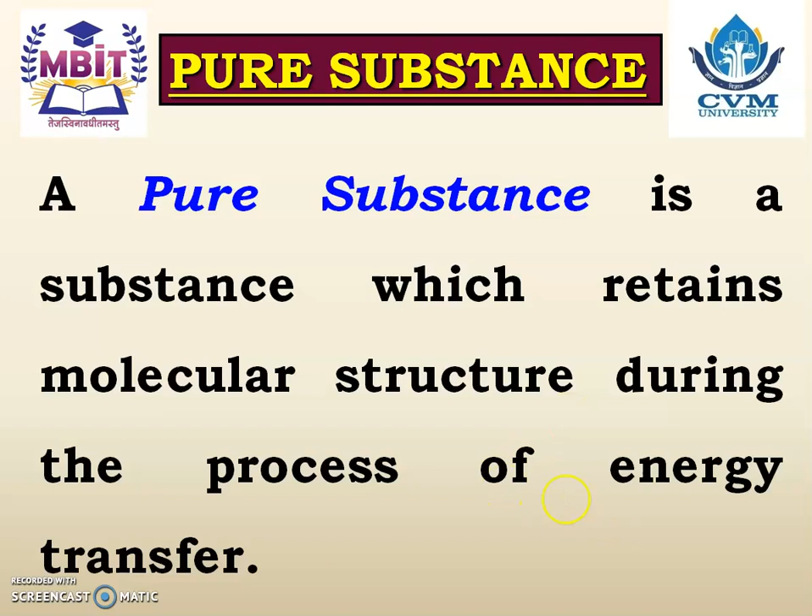Pure substance. A pure substance is a substance which retains the molecular structure during the process of energy transfer. So it means whenever the transfer of heat or energy takes place from one place to another place, if the substance does not change its molecular structure, then that substance is known as the pure substance.

Working substance. A fluid which has the ability to receive, to store and to reject energy as per the requirement is called working substance or working fluid or working medium. It means a fluid which can receive the energy, which can reject the energy as per the requirement. What is the requirement? The interactions between system and surrounding, and that fluid is known as the working substance, working

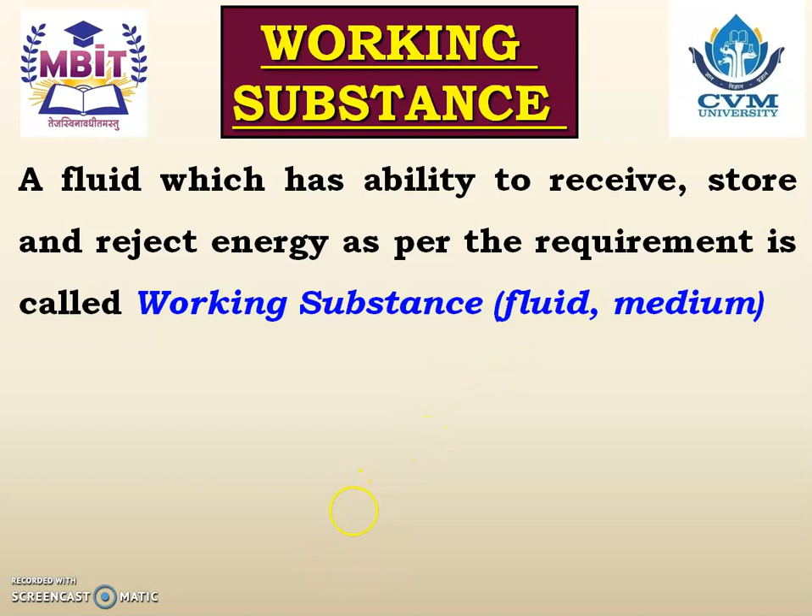fluid or working medium. The working substance may be of two types. One is liquid, another one is gaseous. The example of a liquid working substance is water used in steam power plant and ammonia used in the refrigerator. Now let us study the example of steam power plant.

So we know that in steam power plant, water is supplied to boiler, where boiler converts the water into steam. That steam is supplied to the steam turbine, in which power is generated. After the turbine, the steam is converted back again into water, and the same water is again supplied to the boiler. So this is the working substance, that is water in steam power plant.

And that water receives the heat in the boiler. The steam rejects the heat in a turbine or in the next component. So water is the working substance. In gaseous form, air is the working medium in air compressor. Another example is mixture of air and fuel for IC engine. It means mixture of air and petrol in petrol engine and mixture of air and diesel in diesel engine.

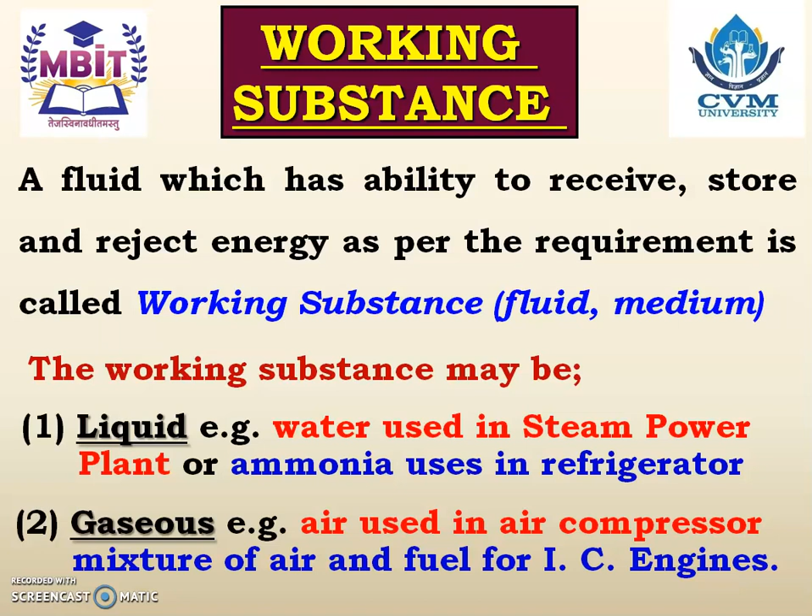Thermodynamic property. How to differentiate between two open systems or two closed systems or two isolated systems? Now you find out how we can differentiate between them. I think we require to compare their parameters. So we have to compare their parameters, and by that we can differentiate between two open systems or two closed systems or two isolated systems.

These parameters are known as thermodynamic properties. So when we have to compare or differentiate between two systems, we have to compare their thermodynamic properties, and then we come to know the differentiation between two systems. Some of the thermodynamic properties are pressure, volume, temperature and enthalpy. By using these properties, we can differentiate between two open systems as well as two closed systems.

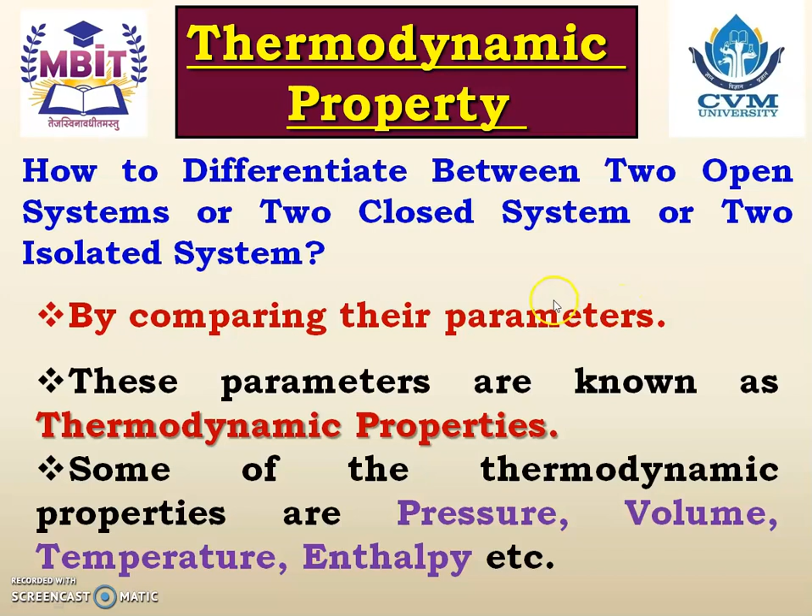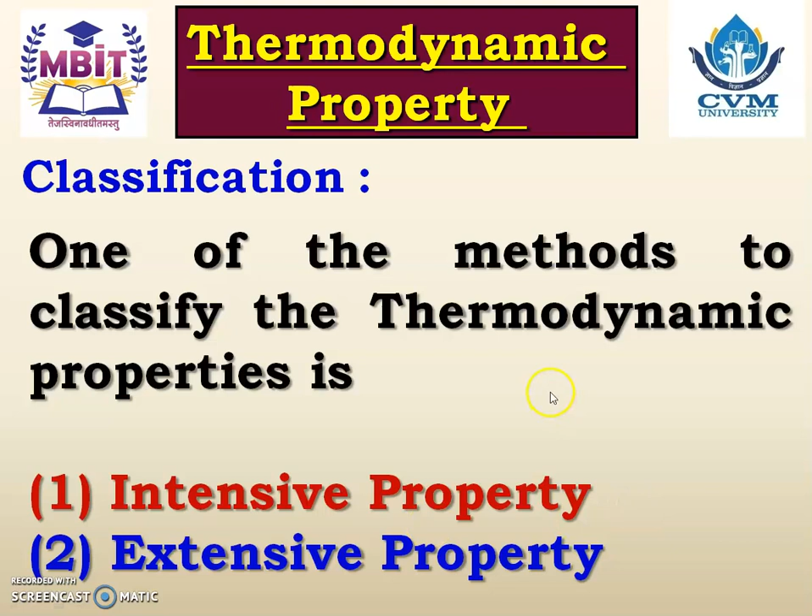Classification. One of the methods to classify the thermodynamic property is intensive property and extensive property. So the thermodynamic property can be of two types. One is intensive thermodynamic property, another one is the extensive thermodynamic property.

Intensive thermodynamic property. The thermodynamic property whose value does not depend on mass of the system is known as intensive property. It means the system can have 2 kg of mass, or 10 kg of mass, but its property is not affected by that mass. Those properties are known as intensive properties. And the examples of intensive property are pressure, temperature, etc.

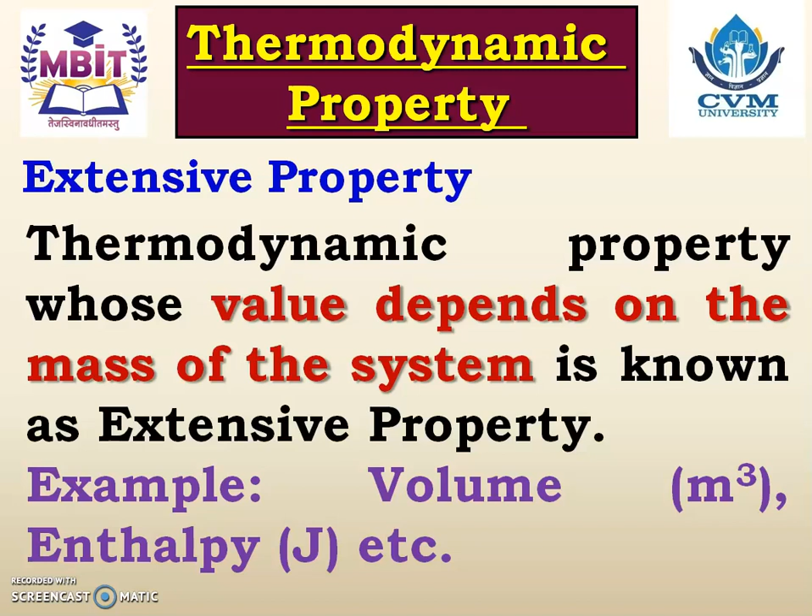The next is the extensive property. The thermodynamic property whose value depends on the mass of the system is known as the extensive property. It means the value of that property will depend upon the mass. If mass is 1 kilogram, the property will be different. If mass is 10 kilogram, the property will be different. So what is the example? Volume and enthalpy.

Generally, the value of extensive property is expressed in per unit mass value, which is known as the specific extensive property. It means generally whatever extensive properties are there, they are expressed in per unit mass value, right? Example is specific volume, that is meter cube per kg. Another example is specific enthalpy, that is joule per kg.

If it is a total volume, the unit will be only meter cube. But here it is specific volume. It means volume per unit mass of the system. So it is known as the specific extensive property, and its value is in per unit mass value.

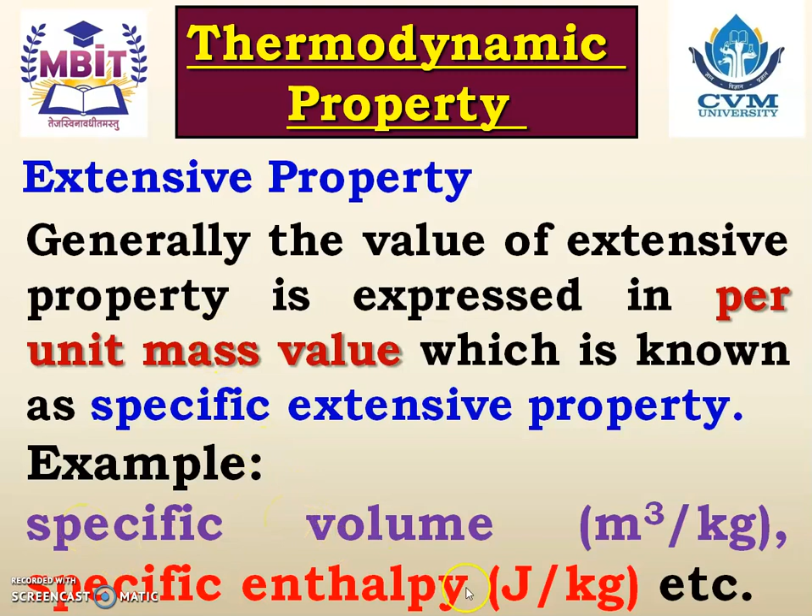The value of a property of a system defines its state. Now this is again another fundamental. So if a system has some property, it is said that the system has this state. Let us take the example.

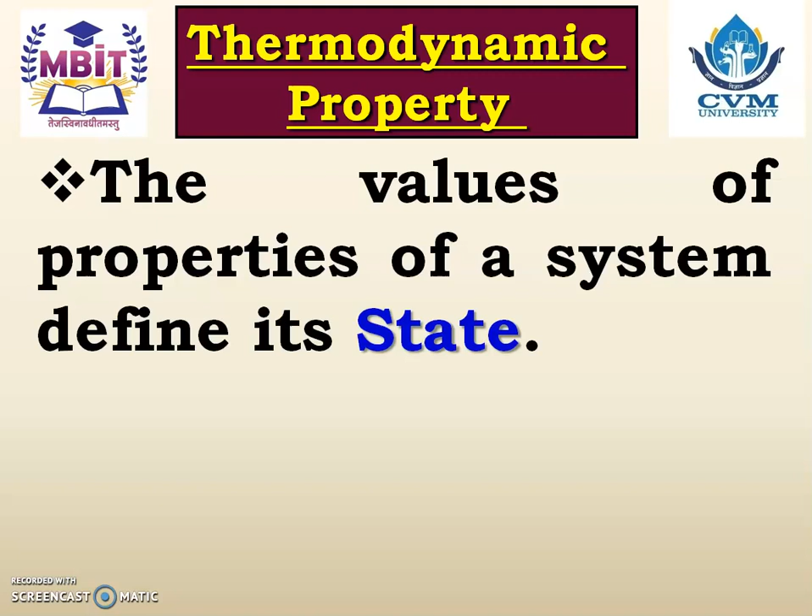Yes, there are two smileys. This is smiley number 1 and this is smiley number 2, and both have different states. One is the laughing state, another is the crying state. And what is the value of that, you can say, laughing state? Yes, that smiley is showing his white teeth. So we can say that yes, this smiley is in the laughing state.

And here, what is the property of this crying smiley? The property of the crying smiley is, you can say, not a good facial expression. Then it is the crying state of the smiley. So this is how the property of a system defines its state. So by looking at their face value, you can identify this person is in an angry mood, this person is in a good mood. So this is nothing but how you can differentiate different states of a particular system.

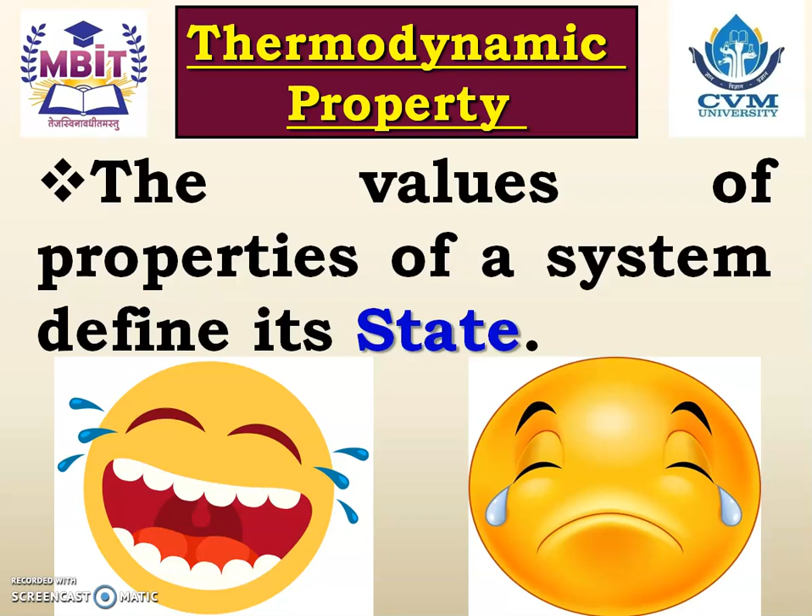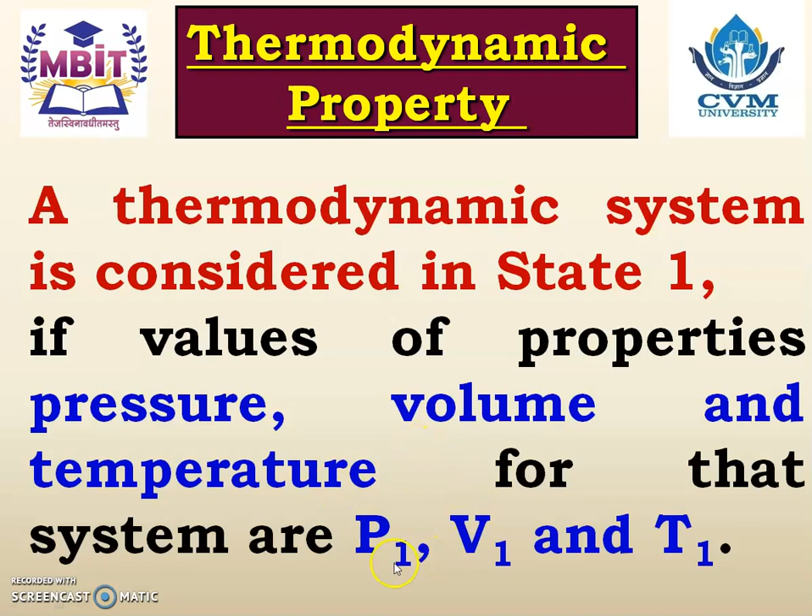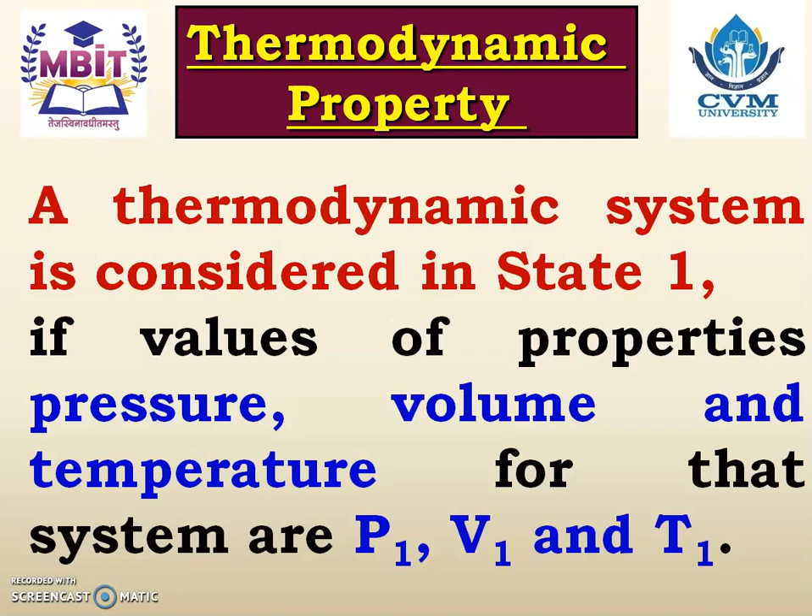A thermodynamic system is considered in state 1. If we compare with the smiley, we can say that it is in a good mood, or smiling mood. Its values of property, which property? Pressure, volume and temperature are P1, V1 and T1. So if pressure is P1, volume is V1 and temperature is T1, then that system is in state number 1. If any of the property changes, the state of that system will change. The value of the property changes, the state of the system also changes.

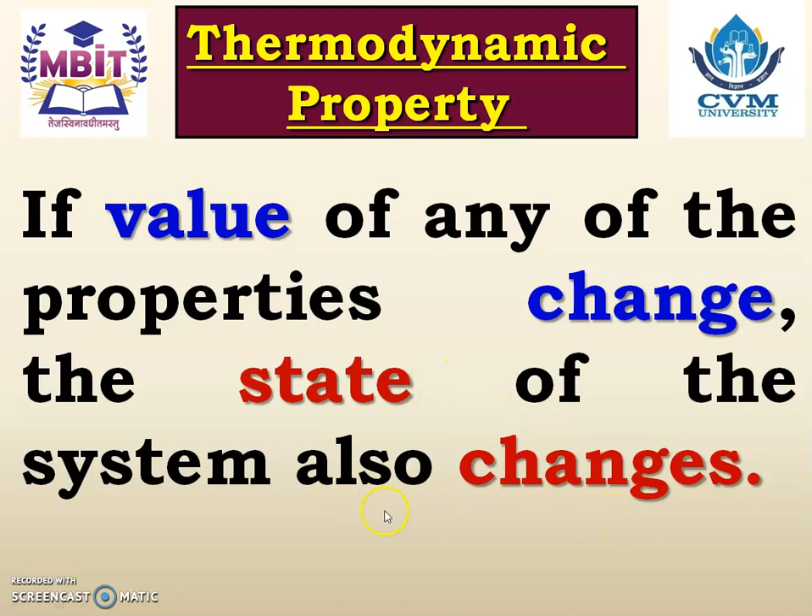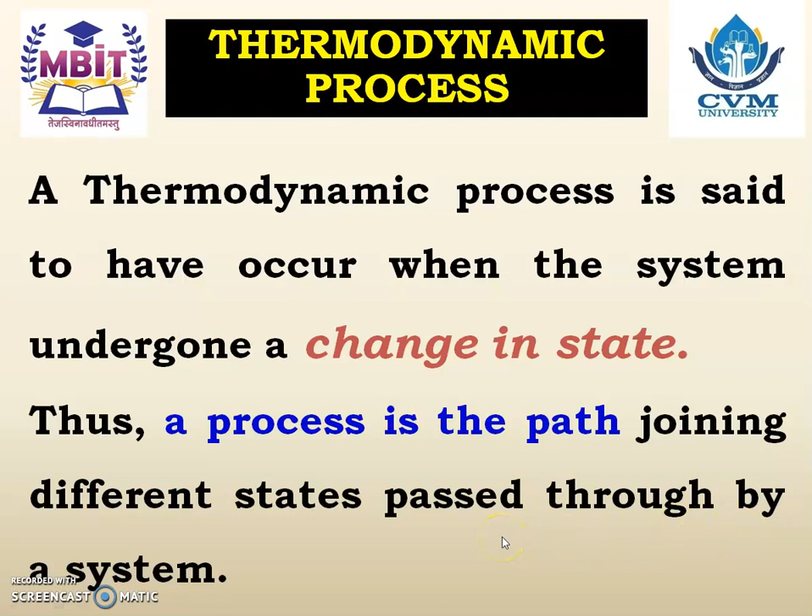Thermodynamic process. A thermodynamic process is said to have occurred when the system undergoes a change in state. It means when its property changes, the thermodynamic process has taken place. Thus, a process is the path joining different states passed through by the system. Let us take the example. This is the diagram between property 2 and property 1. On the y-axis the pressure is in bar, on the x-axis volume is in meter cube.

The system is in state number 1, and at state number 1 pressure is P1 and volume is V1. Now some property of the system changes. As some property of the system has changed, it has reached state number 2. At state number 2, pressure is P2 and volume is V2. Similarly, some property of the same system has changed, and due to that, it has reached point number 3. So at point number 3, pressure is P3 and volume is V3.

Thus, we can say that the system has passed through a process 1, 2 and 3. So 1, 2, 3 is a process, or 1 to 3 also is a process, and the path is 1 to 2 and 2 to 3. It means the system has passed from state number 1 to state number 2 and then state number 2 to state number 3. But overall it is said that 1, 2, 3 is a process. So we can say that a process is made up of minimum 2 states or more than 2 states through which the system has passed.

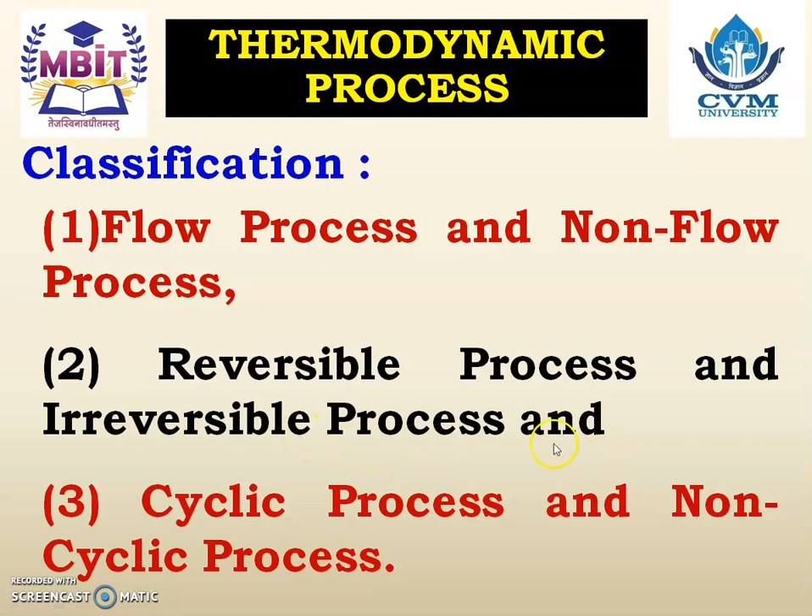Classification of thermodynamic process. The thermodynamic process can be classified into 3 categories: flow process and non-flow process, reversible process and irreversible process, cyclic process and non-cyclic process. So let us understand it one by one.

Flow process. When an open system undergoes a thermodynamic process, it is known as the flow process. So if the process takes place in an open system, then this process is known as the flow process. And when a closed system undergoes a thermodynamic process, it is known as a non-flow process. So when a closed system passes through some processes, then these processes are known as non-flow processes.

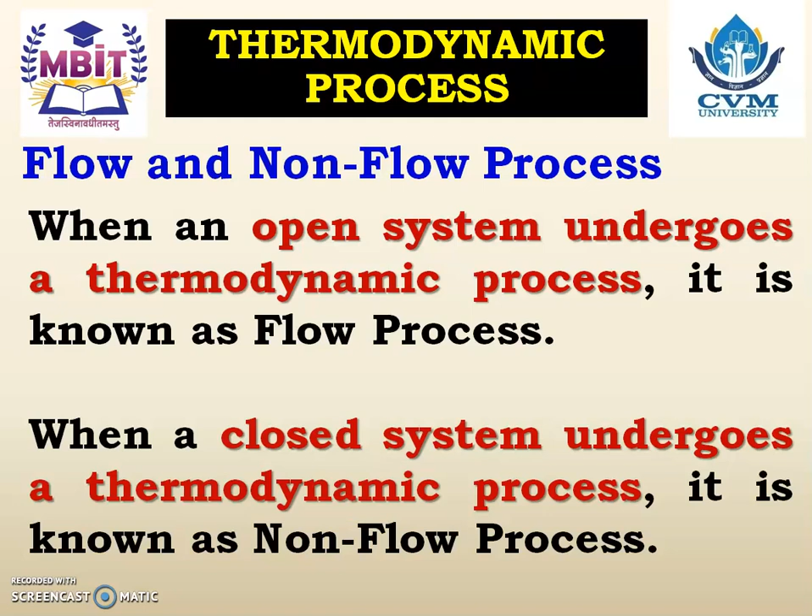Reversible and non-reversible process. Consider a system undergoes a process from state 1 to state 2. While returning back from state 2 to state 1, if the system follows the same route, then the process is known as the reversible process. Now let us take the example.

Consider I am at Ahmedabad and I want to go to Mumbai. So I will pass through different cities. From Ahmedabad I will go to Baroda, then to Surat, and then to Mumbai. That is the path I passed when going from Ahmedabad to Mumbai. Now when I return from Mumbai to Ahmedabad, if I use the same path, then this kind of process is known as the reversible process.

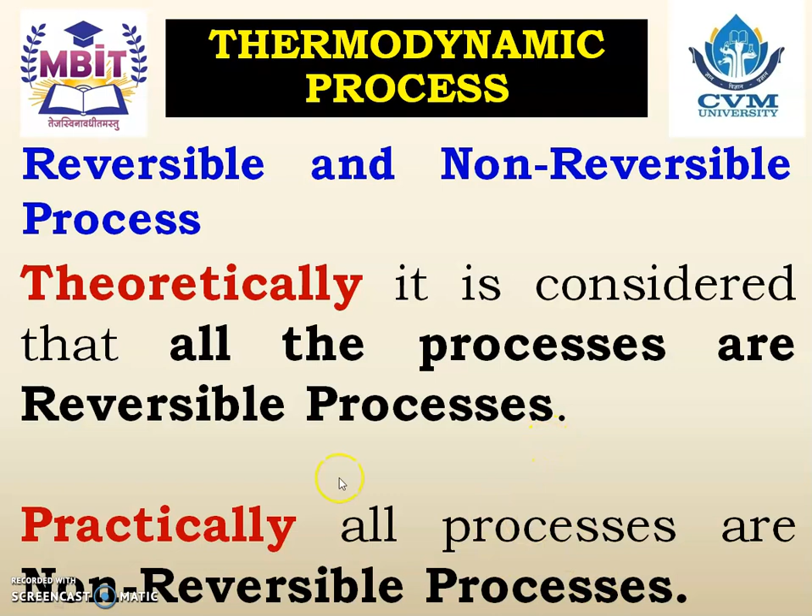Theoretically, it is considered that all the processes are reversible processes. Practically, all processes are non-reversible, or we can say irreversible processes. The important consideration in a reversible process is that at every state the process should be in equilibrium with the system, which is not possible. So theoretically we consider it a reversible process, but practically it is not possible.

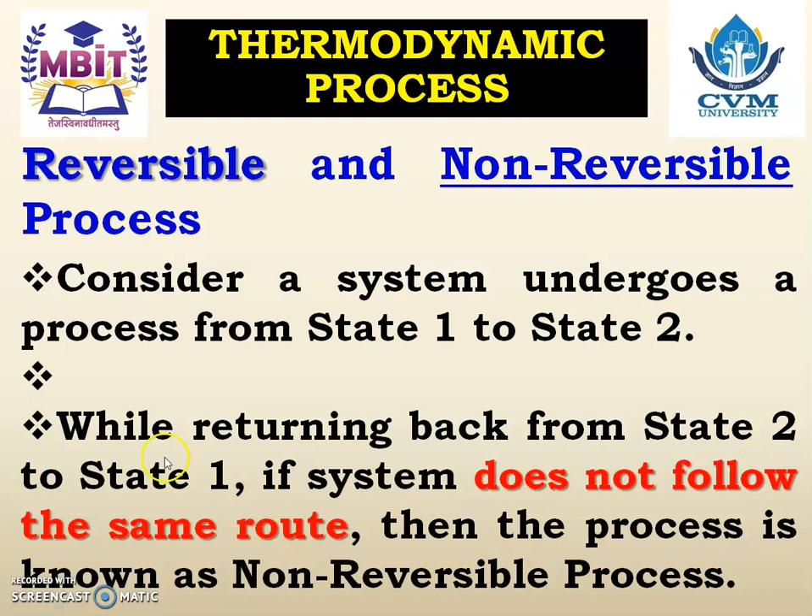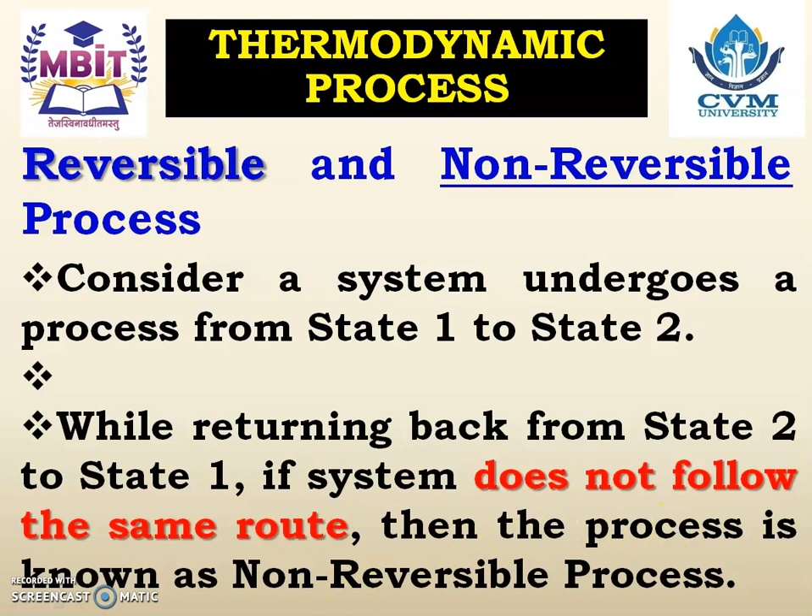Non-reversible process. Consider a system undergoes a process from state 1 to 2. While returning back from state 2 to 1, if it does not follow the same route, then the process is known as the non-reversible process. Let us take the example again. Point 1, pressure P1, V1. Point 2, pressure P2, V2. Point 3, pressure P3, volume V3. The system passes through state 1, state 2, state 3, and 1-3 is a process. The path is 1 to 2, 2 to 3.

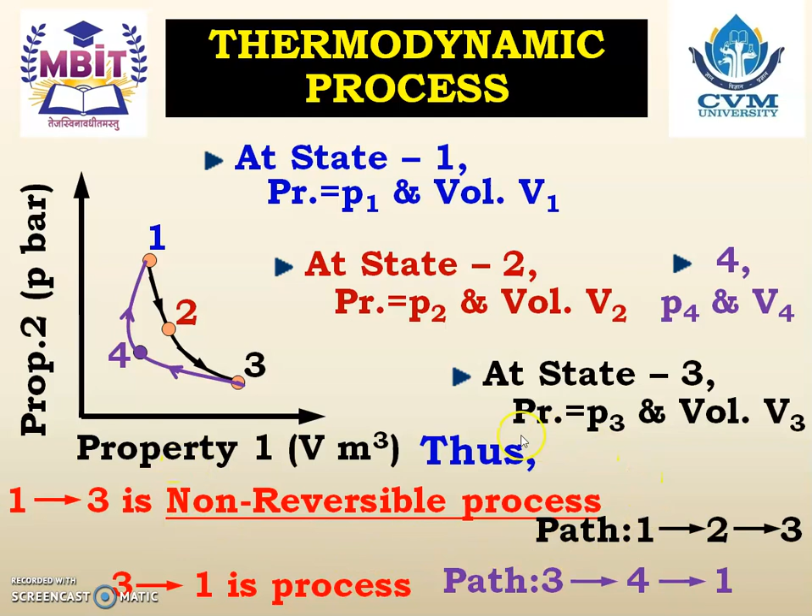Now, while returning back, it passes through the route 3 to 4 and 4 to 1. So 3 to 1 is a process, but the path is 3 to 4 and 4 to 1. So we can say that 1-3 is a non-reversible process. It is not a reversible process.

Cyclic process and non-cyclic process. When a system undergoes two or more consecutive processes in such a way that the initial and final states of the system are the same, then it is said that the system has undergone a cyclic process. For example, if I travel from Ahmedabad to Mumbai and come back from Mumbai to Ahmedabad, then I have passed through a cyclic process. And while returning, it need not be the same path. It can be a different path also.

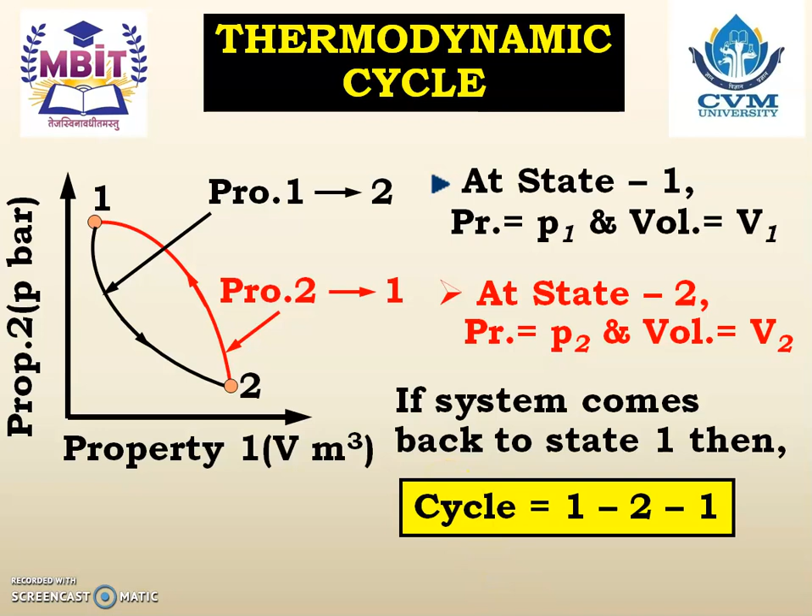Let us see the example again. At state 1, pressure is P1, volume is V1. At state 2, pressure is P2, volume is V2. The system has passed through process 1 to 2. Now, the system again reaches the initial state 1. The path is different, process 2 to 1, but the system reaches the initial state. Then it is said that the system has passed through a thermodynamic cycle, and the cycle is denoted by 1 to 2 and 2 to 1.

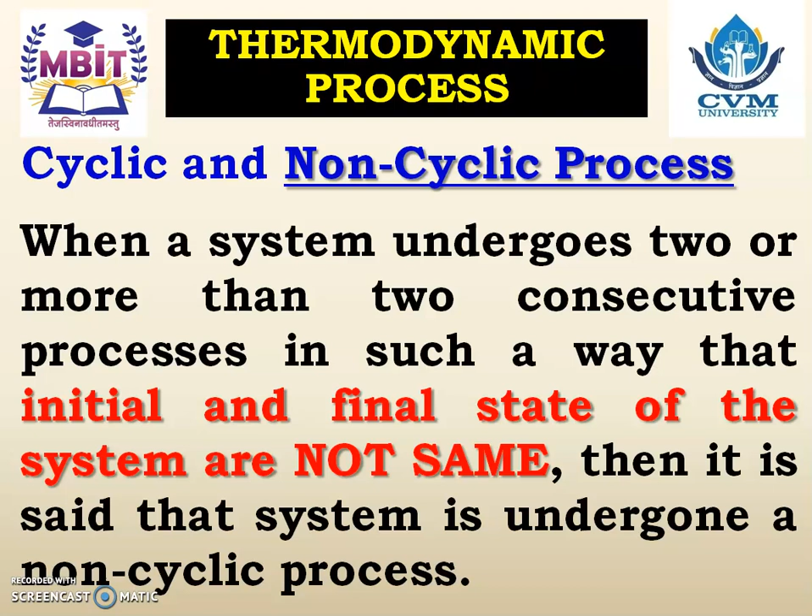Non-cyclic process. When a system undergoes two or more consecutive processes in such a way that the initial and final states of the system are not the same, then it is said that the system has undergone a non-cyclic process. For example, if I travel from Ahmedabad to Mumbai and from Mumbai to Jaipur, then I have passed through a process, but it is not a cyclic process. It is a non-cyclic process.